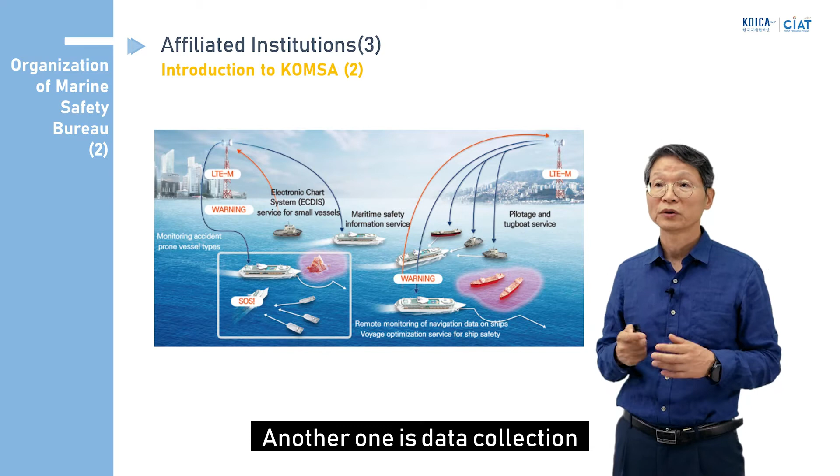KOMSA's main service areas include education, broadcasting, and development of technology related to maritime transportation safety. Another is research on technical standards and ship inspection systems that comply with the International Convention on Ship Safety. And another is data collection, investigation, research, and international operations related to maritime transportation safety.

Let's continue with their main service areas. These are execution of tasks entrusted by the government, including ship inspection and passenger ship safety operations, operation of ship safety information systems and provision of information, and management of greenhouse gas (GHG) emissions and air pollution from ships.

There are also many rules and regulations related to marine safety. You may visit the English version of the website for details on related laws and regulations, provided at the bottom of this slide.

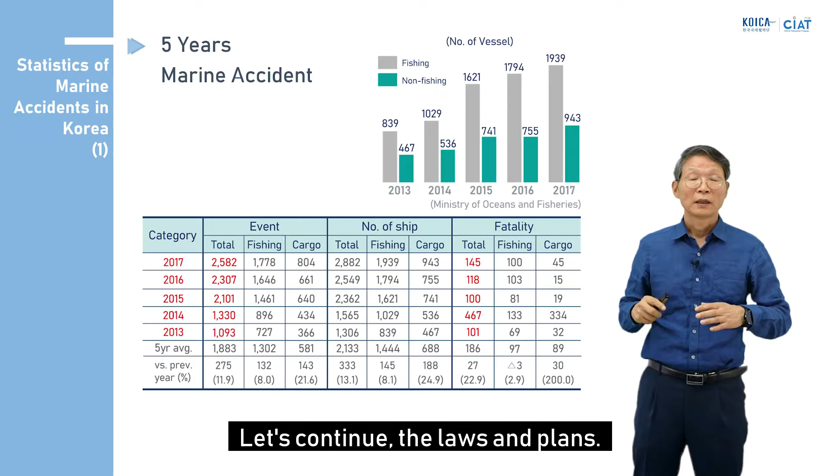Let's continue with laws and plans. We have had various accidents and very sad stories of those accidents, and we have had amendments and reform of the organizations following those accidents.

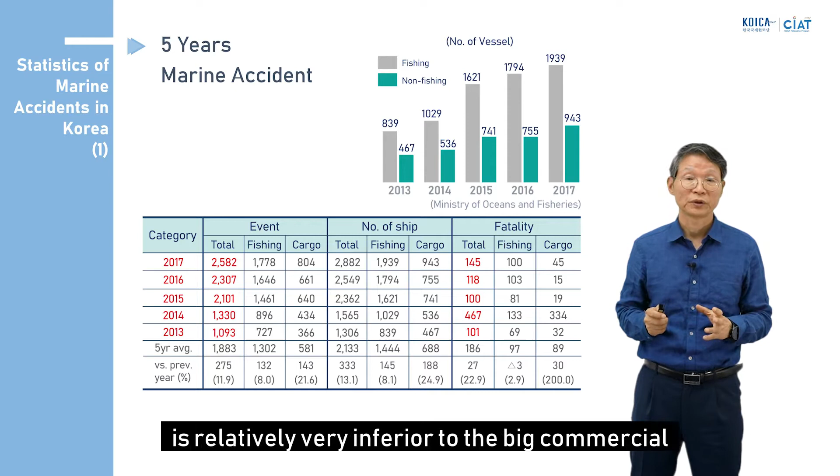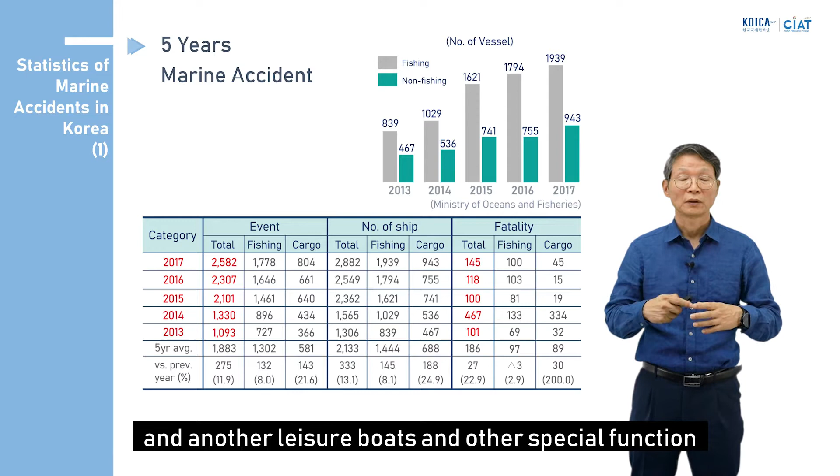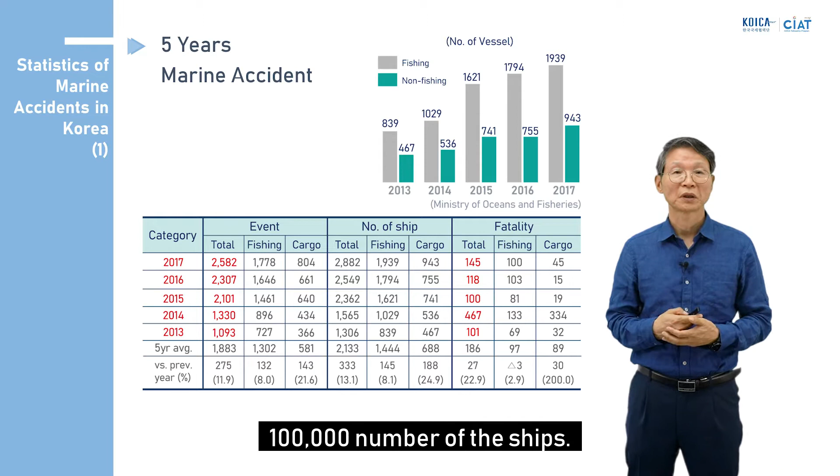Fishing boats are relatively inferior to big merchant ships, and they have more small accidents and incidents. Our country has about 65,000 fishing boats, about 1,000 merchant ships, and also leisure boats and other special function boats. Altogether in Korea we have around 100,000 ships.

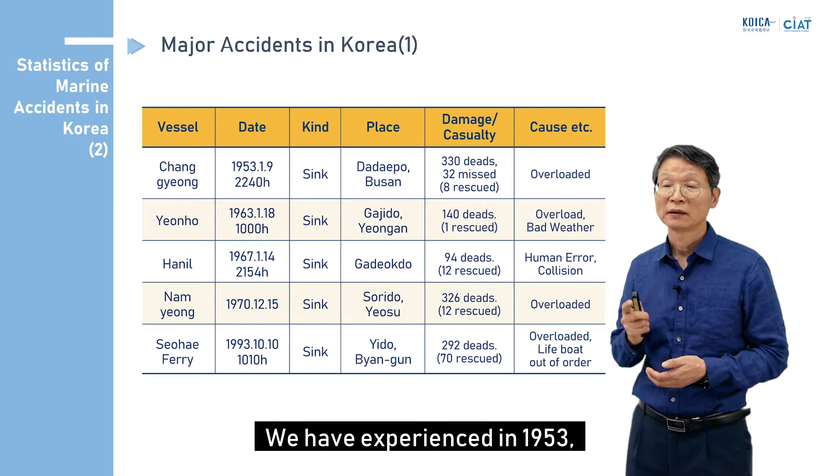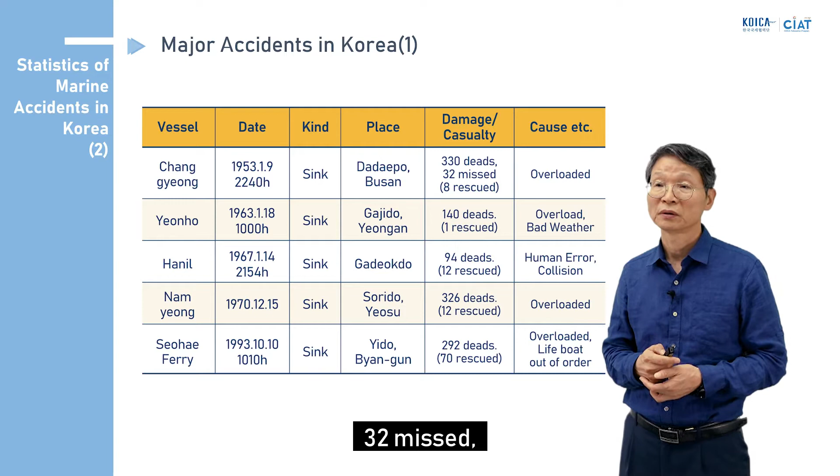Let's see the major accidents we have experienced. In 1953, the first big accident occurred: 330 people dead, 32 missing. It was a huge accident. About 10 years later, another big accident: 140 dead. In 1967, also a big accident: 94 dead.

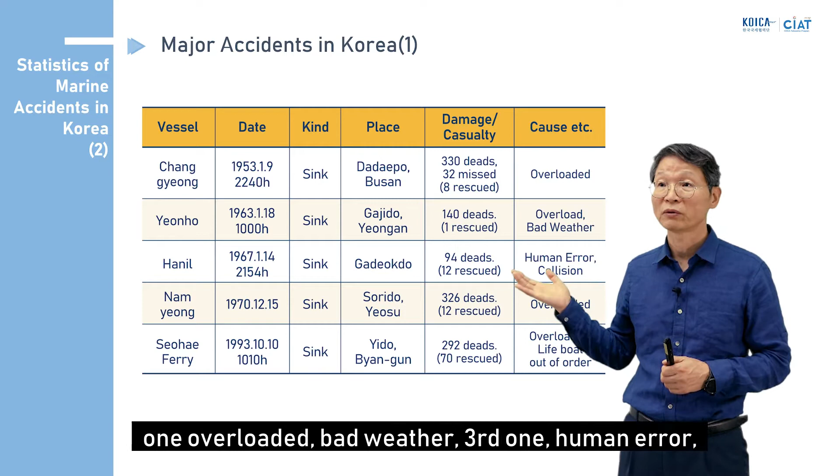In 1970, 326 dead. In 1993, 292 dead. That's all. You can see the causes of the accidents: the first was overloading, the second was overloading and bad weather, the third was human error and collision, the fourth was overloading, and the fifth was overloading. So it's a repeated same error that makes a big accident.

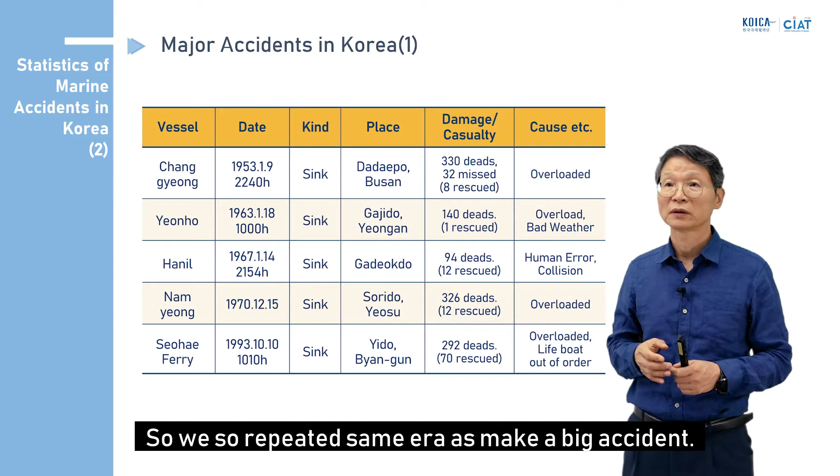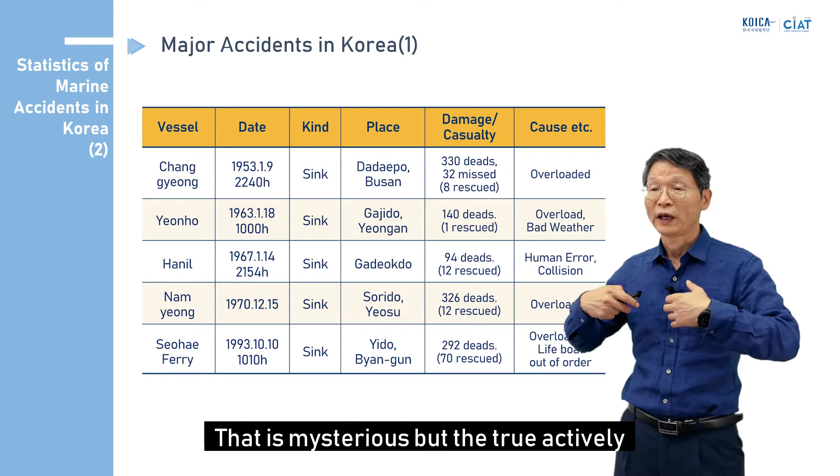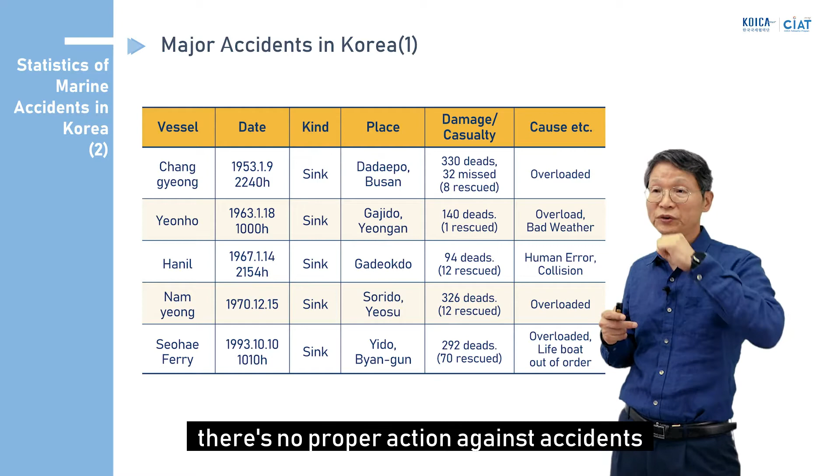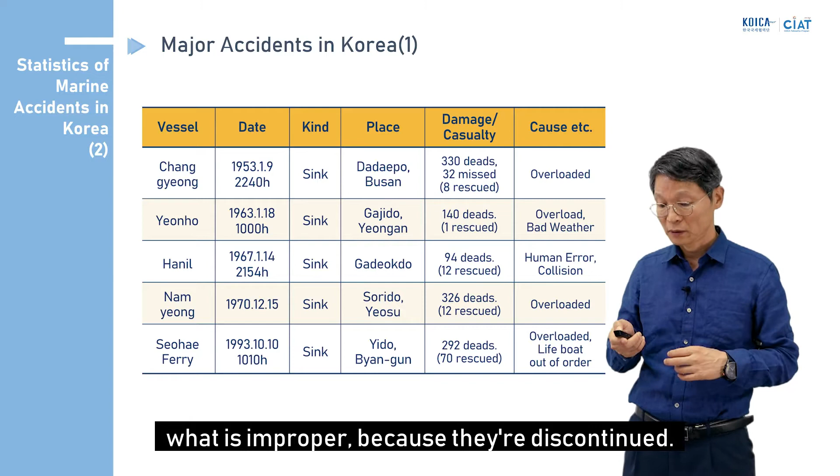That is mysterious, but retroactively we can imagine there was no proper action taken against those accidents, and what was insufficient and improper was not corrected, because it continued to happen.

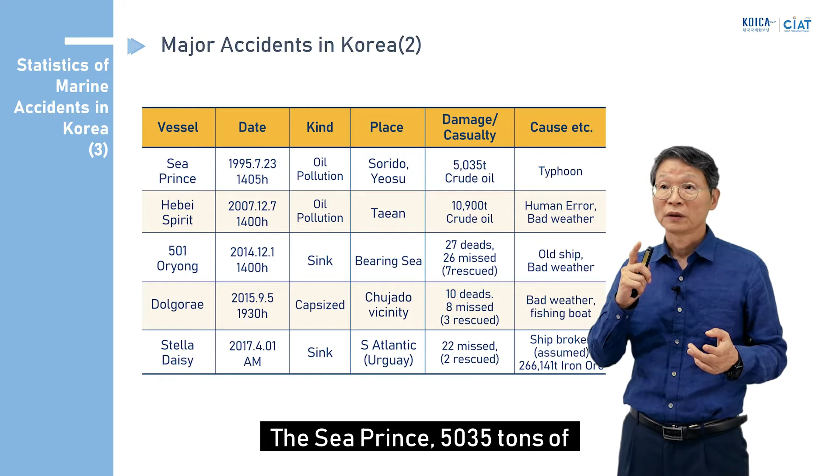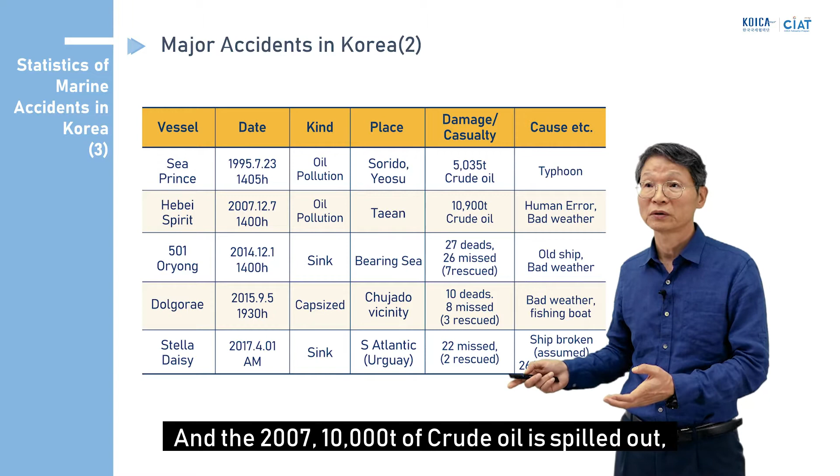This shows another major accident. The Sea Prince spilled 5,035 tons of crude oil, and in 2007, 10,900 tons of crude oil spilled out. These are two very notorious and serious oil pollution accidents that we have experienced.

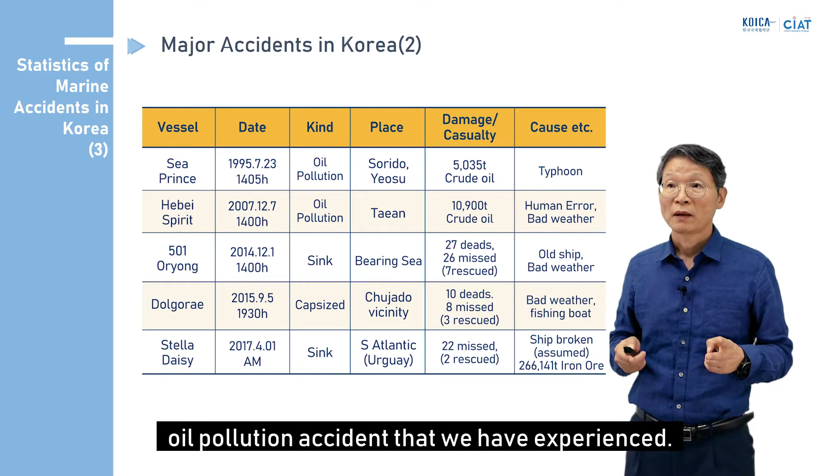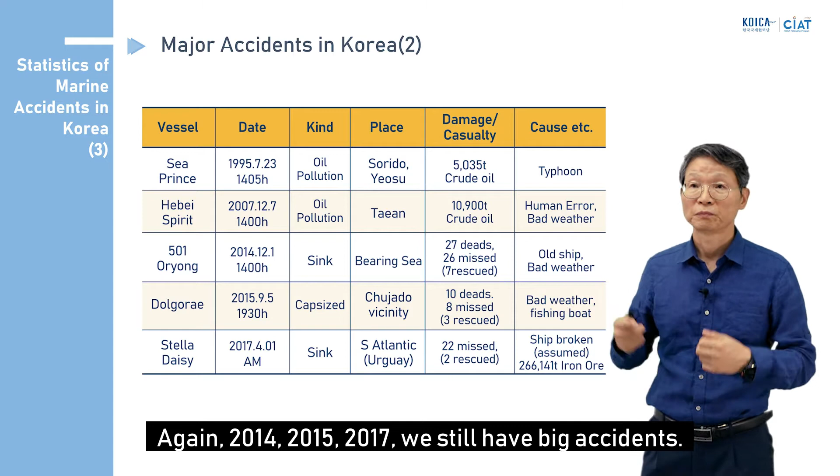Again in 2014, 2015, and 2017, we have still had big accidents, caused by typhoons, human error, old ships, bad weather, ships breaking, etc. Many reasons.

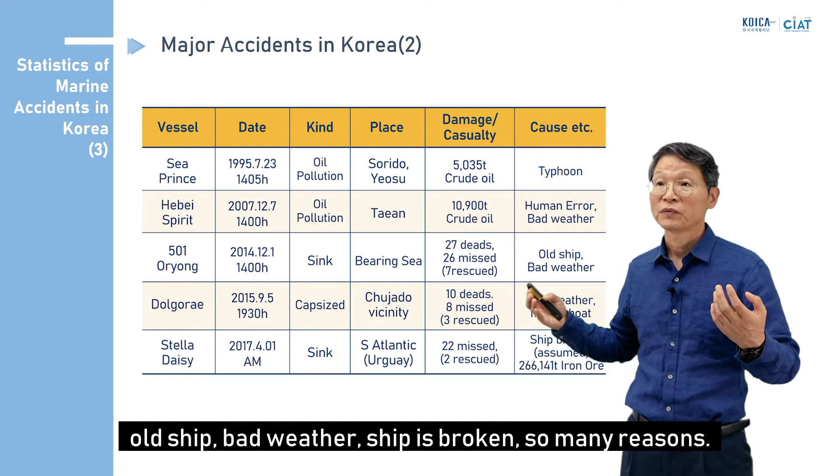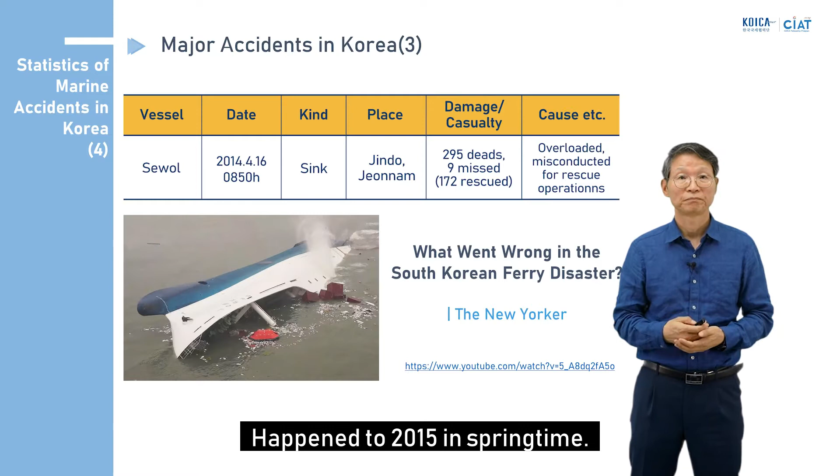Recently we have had a really serious accident, the Sewol. That is a car ferry ship. It happened in 2014 in springtime. The ship sank in a very calm sea, and about 304 people died. It's a huge accident.

You may see one documentary film at this website address on YouTube: 'What Went Wrong in the South Korean Ferry Disaster,' produced by The New Yorker.

By the influence and consequence of this accident, the Sewol-ho, our country had big changes. Directly or indirectly, the president of the country was impeached, and for so many months the people held demonstrations.

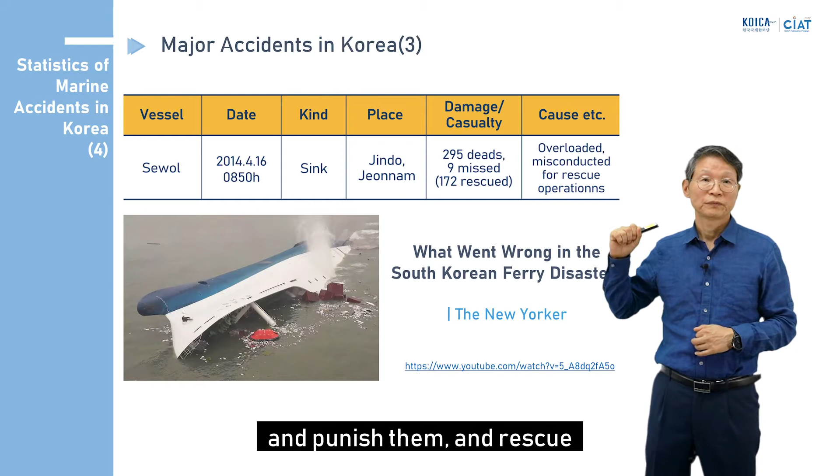Who is responsible for this accident, and punish them, and rescue this ship from the 140, 50 meters sea water bottom.

It took more than 8-10 months, and finally we take out this ship, and we stored this ship at the port, and investigate the reason. The main reason is same, very similar.

Repeated overloading and misconduct during rescue operation as well. This made this disaster. So after this, the new government took the helm, and there's a reform of the organization, not only the MOF, but the public entity who are responsible for these ferry operations.

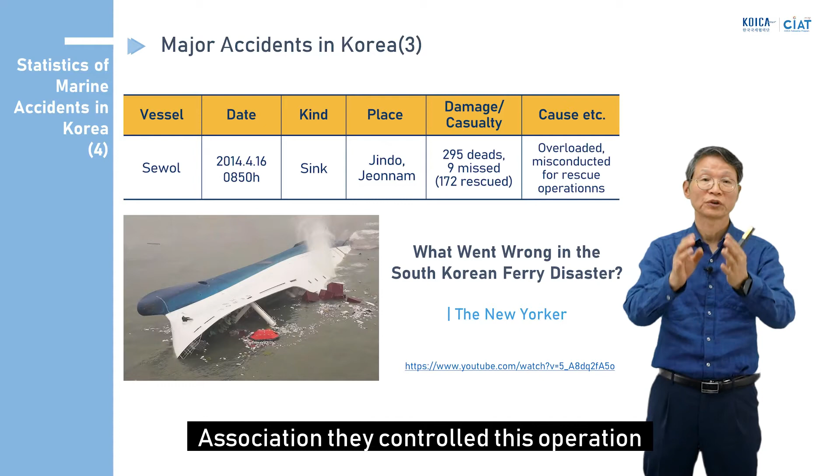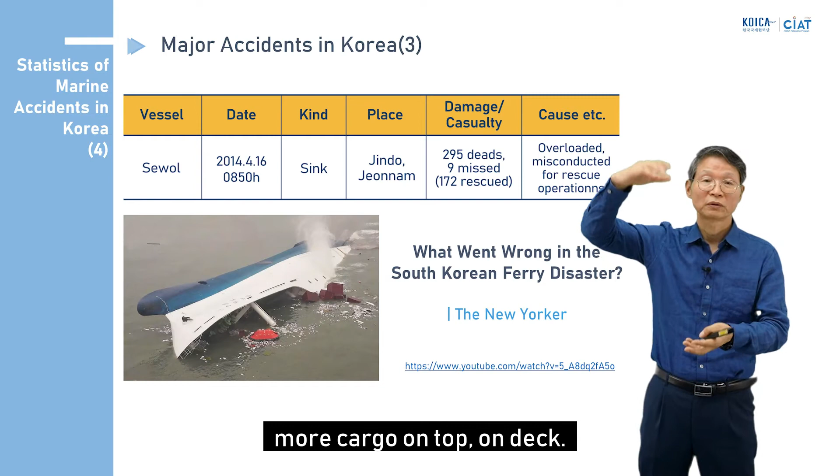Previously, the Ship Owners Association controlled these operations, and they wanted to load more cargo and make more income. They disregarded the safety of the ship, deballasted the safety water, and loaded more cargo on top, on deck, and lost the stability, and finally the ship capsized.

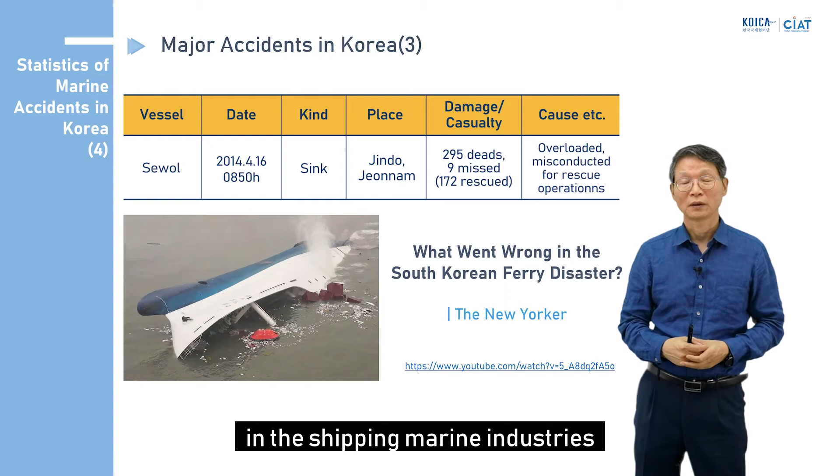So I hope this will not continue in future. This is the last big accident in Korea, and this gives a lesson to the world and the shipping marine industries to prevent the same accident.

Consequently, our government and the MOF initiated many countermeasures against the accident regions, and also prepared R&D to prevent those marine accidents. The MOF and the government established a new system of maritime safety superintendent.

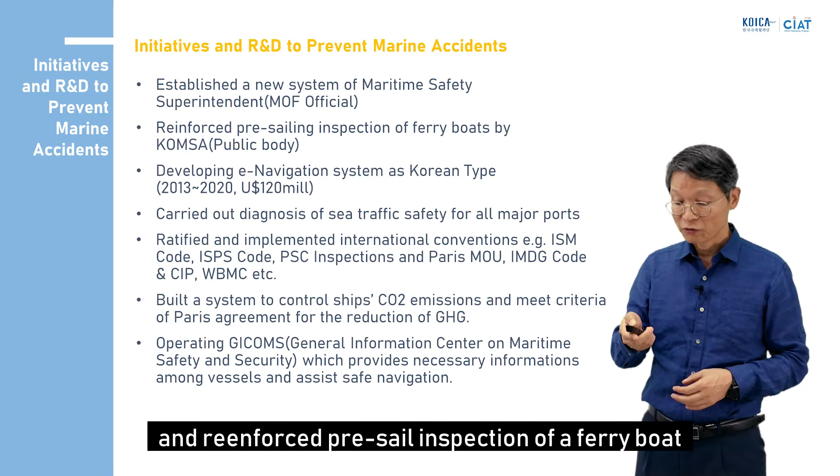This is the superintendent about the government. They posted main port for the passenger ship operations, and they directly supervise and inspect the safety of the ship. This is a new organization, and reinforced pre-sailing inspection of a ferry boat by KOMSA.

Previously, I introduced one sample of the public entity, that is KOMSA. They inspect every ship before sailing with a safety checklist, and then they permit the sailing.

And also developing the e-navigation system as a Korean type. The e-navigation system is under development according to IMO initiatives. Many countries invest, but this one is Korean type.

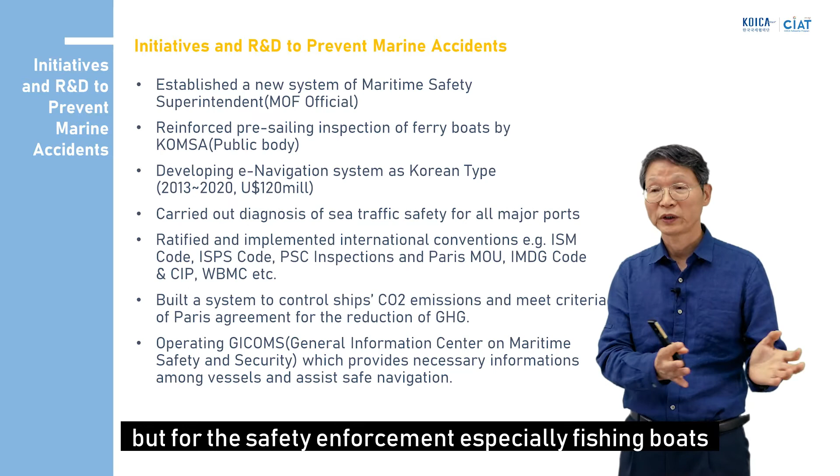This is applied not only to merchant ships but fishing boats. Fishing boats are not under international convention, but for further safety enforcement, fishing boats are weak, and the owners are very poor, with no money to invest for safety, so the government supports them and they will equip e-navigation systems in the future.

That's a huge amount, and a very effective project we anticipate. And also the government carried out the diagnosis of the sea traffic safety for all major ports.

All the incidents happen more frequently in the port area. When entering and sailing, there are more accidents. So the government carried out the diagnosis.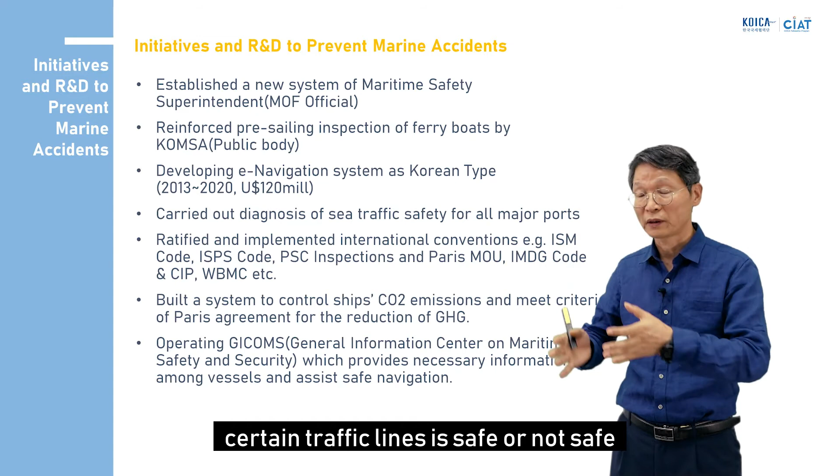Whether certain traffic lines are safe or not, or what is hampering the safety of ship operations, and then they find the lack of safety, the security, and then they correct them.

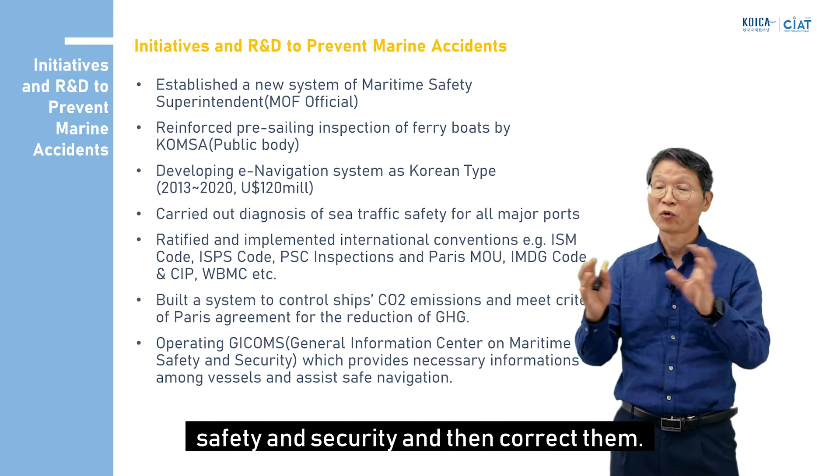Next one is ratifying and implementing international conventions such as ISM code, ISPS code, PSC inspection, and the Paris MOU, IMDG code, and the CIP, water ballast management convention, etc.

The IMO Secretary General is Korean, and we actively involve the IMO initiatives, and we participate and prepare what those conventions require.

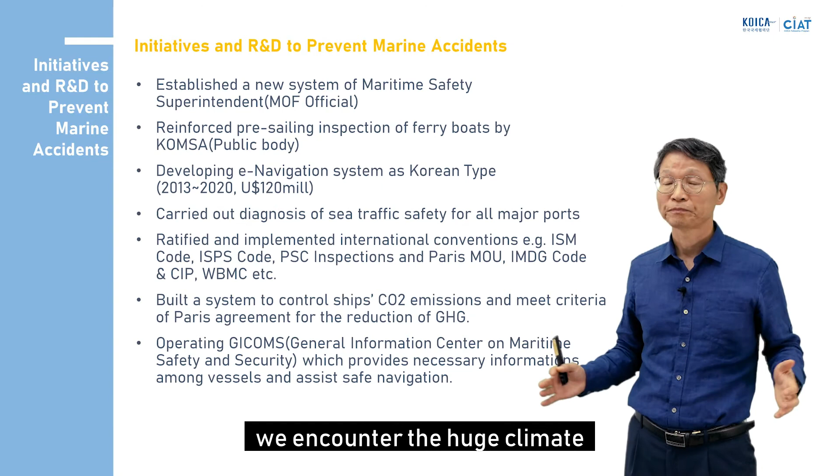And another one is built to control ships' CO2 emissions and meet the criteria of the Paris Agreement for the reduction of GHG, greenhouse gas. Nowadays, we encounter huge climate changes, mainly because of CO2 emissions.

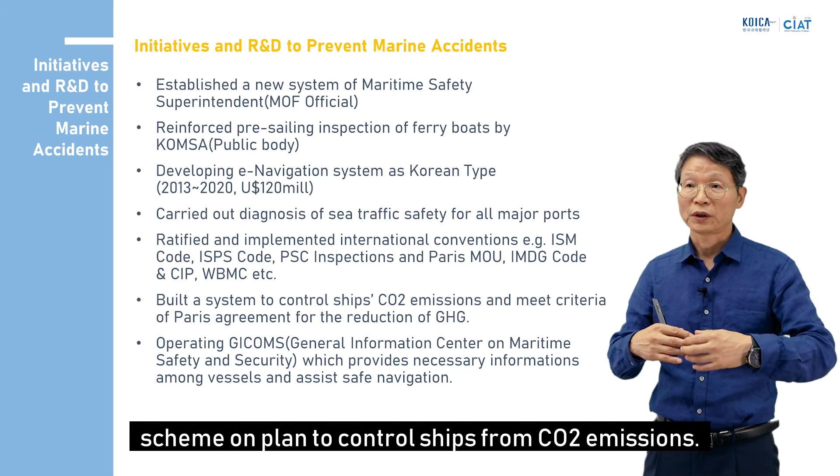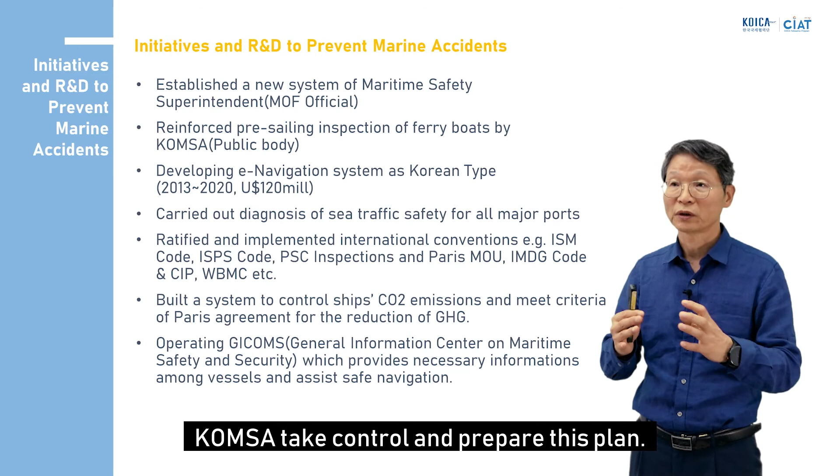So in our country, we prepare our own scheme, our own plan to control the ship's CO2 emissions, and we hope the ship and marine transportation sectors meet this criteria. Mainly the government and KOMSA prepare this plan.

Another one is operating GICOMS, General Information Center on Maritime Safety and Security, which provides necessary information among vessels and assists safe navigation. GICOMS is one of the platforms providing all the necessary information on marine safety.

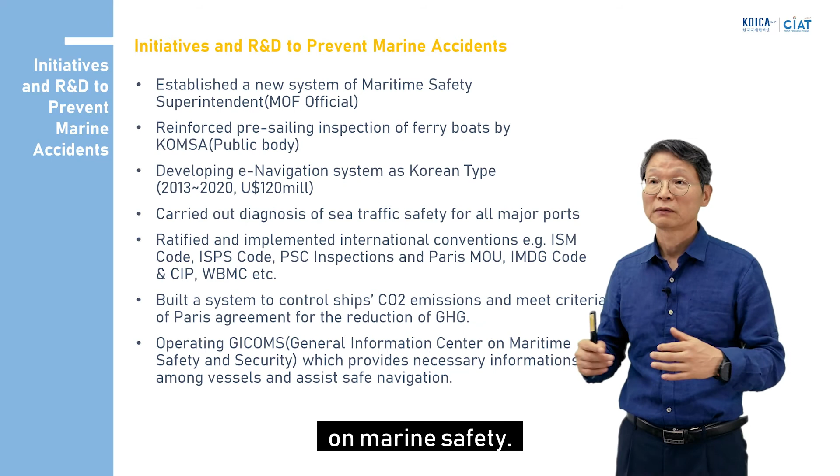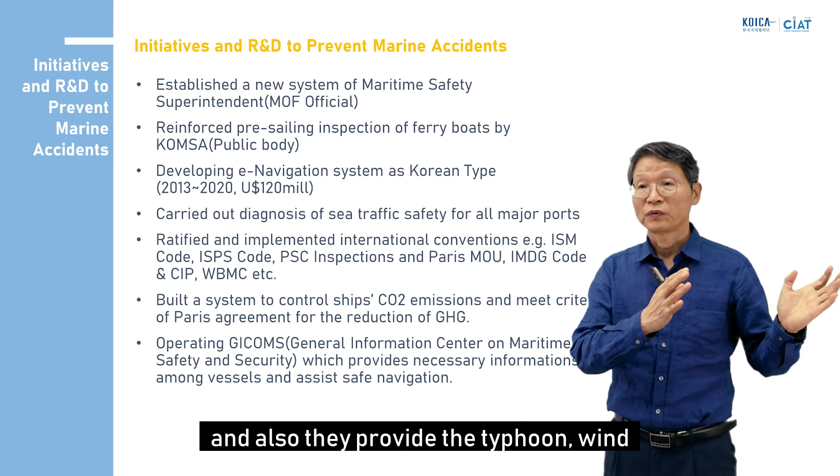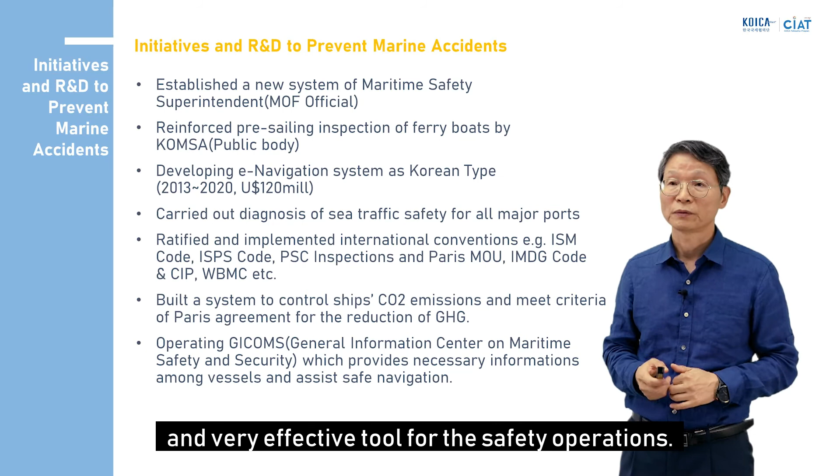They develop digital information systems and also provide typhoon, wind, and wave safety information in real-time. So it's a very powerful and very effective tool for safety operations.

As it's time to wrap up what we have introduced and reviewed, marine administrations of the Republic of Korea. I hope you have some insight and some leverage on how to prepare your own country's marine administration policy and strategies.

When I prepared this lecture, I realized both East Timor, Timor-Leste, and Korea, Republic of Korea, have so many similarities, share common things, like South Korea also being an island country surrounded by water. Yours is the same, and we share the same longitude and time zone, and also we are divided south and north, you west and east.